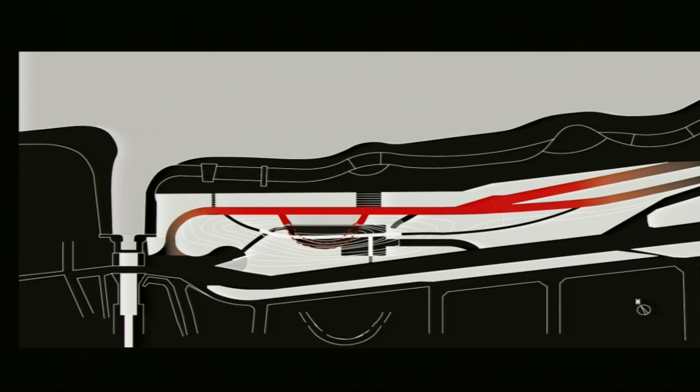I'm sorry, I think there was a recording issue. It's okay, and the plan is like that.

The section is very important. The river is here, the town is here. Actually the tsunami came to here, and they came to here. This is the entrance of the building, and those small houses were destroyed. But luckily, because of this section, this building survived.

This is a big window which separates exterior and interior. It acts as furniture - this part outside, this part inside.

The tsunami happened March 11th. I went to this building April 2nd, just 2 or 3 weeks after the tsunami. At that time the train was not connected, only the freeway was connected. From Tokyo to here it took 7-8 hours, so only by small cars.

Luckily the building survived, but surrounding the town, 60% was destroyed. It's unbelievable, I still remember what was happening around the buildings. I found nature is so much stronger than architectural design. So if we ignore nature, if we forget nature, the architecture cannot survive. That is a strong message from the disaster.

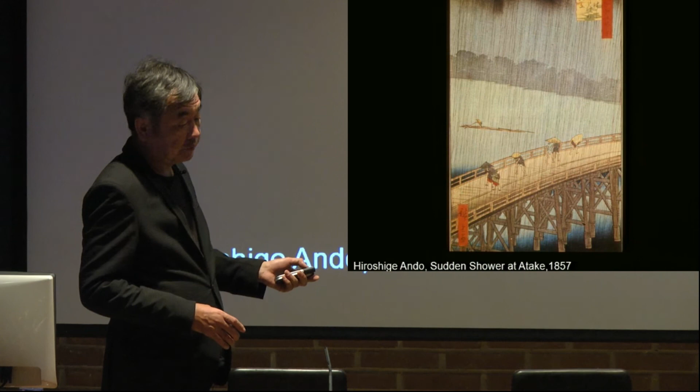This is a very famous Hiroshige Ando work, 1857. Many artists learned many things from his work. A good example is Vincent van Gogh, he made a copy of Hiroshige. Van Gogh thought the message of Hiroshige was to respect nature. It is very different from Western painting at that time. And another great artist who learned from Hiroshige is Frank Lloyd Wright.

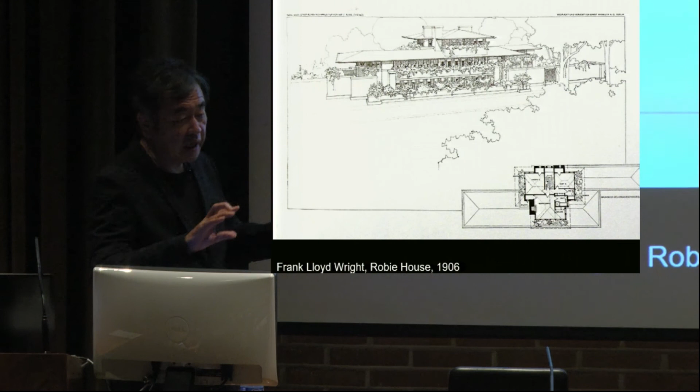This is his drawing, and the style is very much influenced by Hiroshige. Some art historians thought that without Hiroshige, Frank Lloyd Wright could not have found his style. The basis of his style is layering, transparency, juxtaposition between nature and the building, and that idea came from Hiroshige. Actually, Frank Lloyd Wright was a big collector of Hiroshige - in Boston Museum, many works of Hiroshige were collected by Frank Lloyd Wright.

What I did for the Hiroshige Museum is translate Hiroshige's idea into architectural design - transparency, superjuxtaposition of natural material. So you saw in his work the layers of rain. I want to go back.

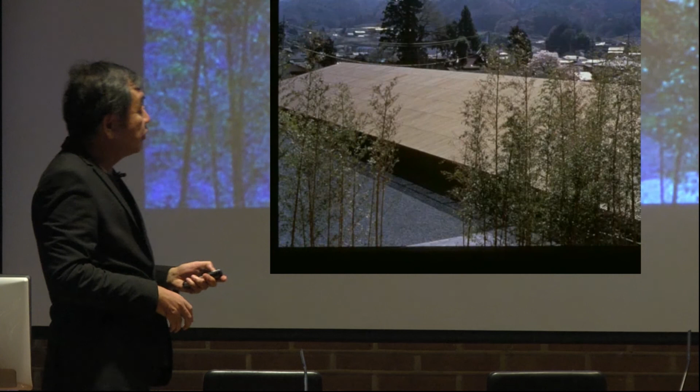Layers of rain, layers of forest - 1 layer, 2 layers, 3 layers. In front of those layers, he draws lines of rain for better understanding. The second layer is bridge, and the bridge is also transparent. The third layer is river, and the fourth layer is forest. Juxtaposition of these 4 layers - that is the important point of Hiroshige.

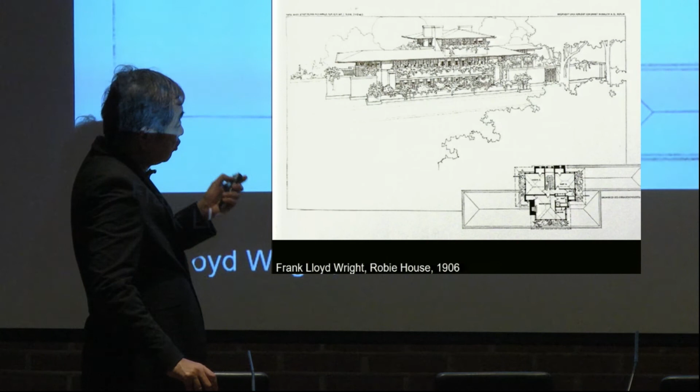And also this guy, Frank Lloyd Wright - for him, layering is a very important method. And for my Hiroshige Museum, I wanted to create layering.

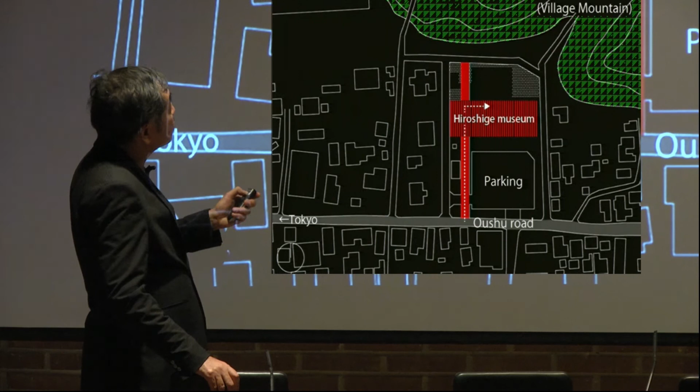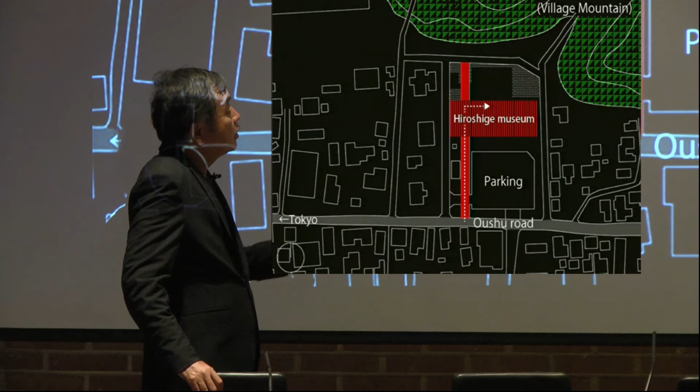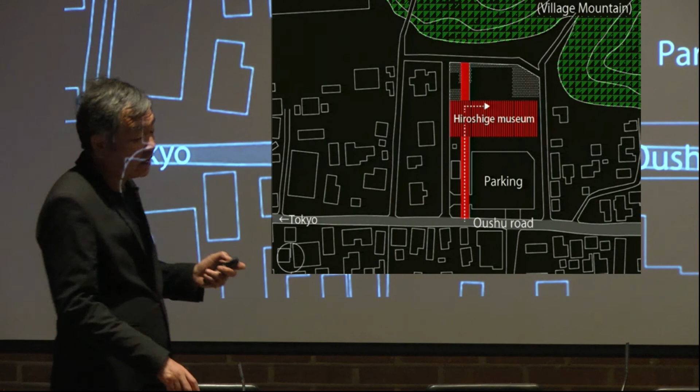Also in the Hiroshige Museum, the museum works as a gate between the mountain and the village. In Japanese traditional villages, the mountain always has a shrine as an edge, because the people believed that if the village mountain was gone, they could not survive - every energy, every material, every resource came from the mountain. The life of the village totally depended on it, and so they built a shrine. This is a very strong message.

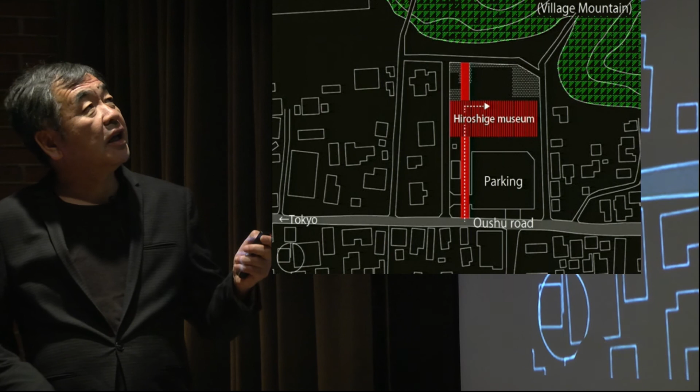But in the 20th century, people forgot the message. They abandoned the mountain, cut the trees, and abandoned the shrines. In this village, the mountain was in a very bad condition, and the shrine was totally abandoned - it became a ruin in this village.

My message through this building is not to go to the building, but to go through the building to the shrine - that is the message of this building. I also tried to use material from the mountain as much as possible.

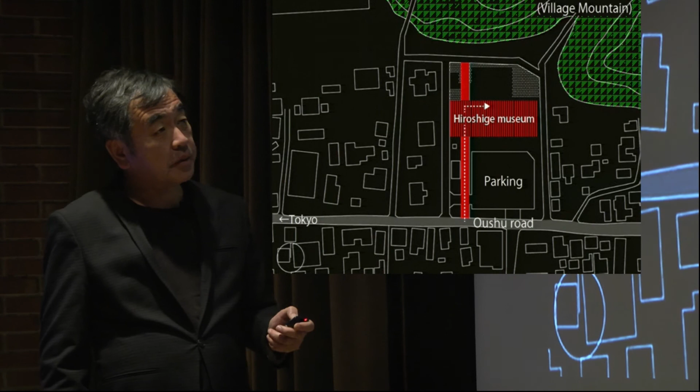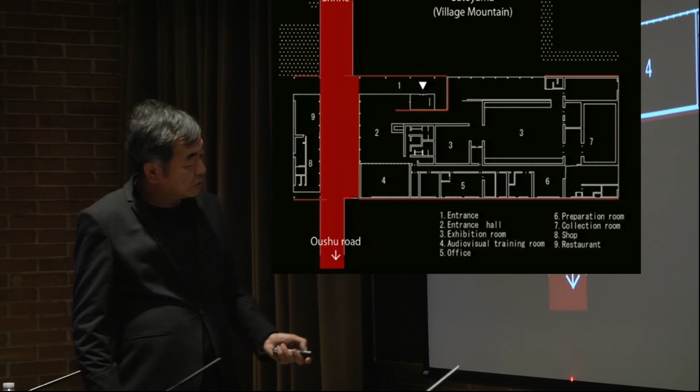The entrance comes from the village center and goes to the shrine, not to the building. So this is my message: the shrine is more important than my building. The building is just the gate to the shrine.

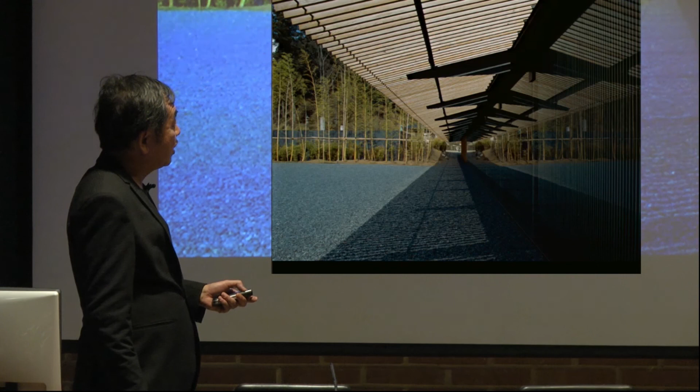And those are the details - transparency and superjuxtaposition are the theme of the detail, and also those materials come from the mountain.

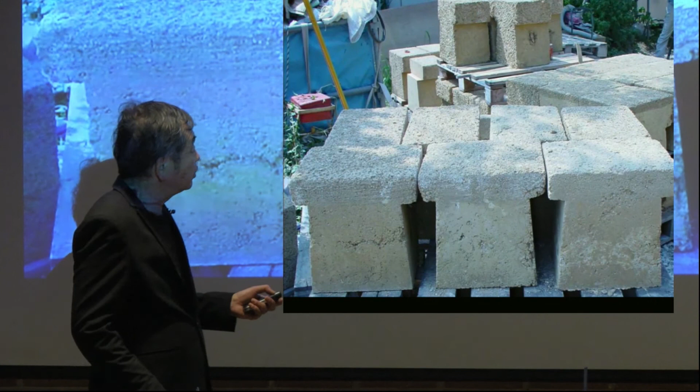That is the Adobe method, and in this village they built a wall and a building using it. But in the 20th century they forgot. So I'd like to reconstruct that method - this is a new block, an Adobe block, made by the soil and clay of the place, and this is the final building.

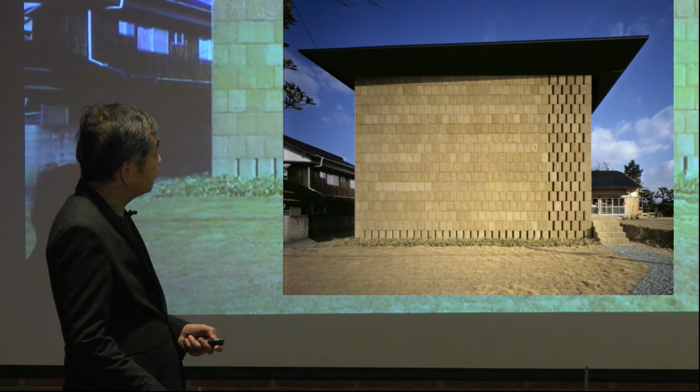In that building we have just one Buddha from the 12th century, and it is one of the national treasures in Japan. Usually we need perfect air conditioning for a national treasure, but in this case the material, the adobe, can control humidity and temperature. So we don't have any machines in the building - the material is controlling the environment, and I think that idea is important.

Before the 20th century, we didn't use machines for air conditioning - the material and the architectural design controlled the environment.

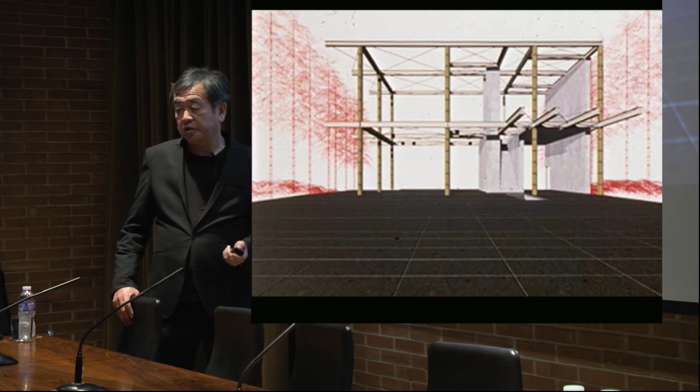The next material is bamboo, as I love bamboo. Bamboo is a very transparent material, but we should solve the problem of cracking. So our solution is to use bamboo for the formwork of concrete - we injected concrete into the bamboo.

Of course we need to cut the fillers of the bamboo. After filling the concrete, we can make this kind of building - the floors, partition, ceiling, all made by bamboo. Superjuxtaposition again, transparency again, by natural material.

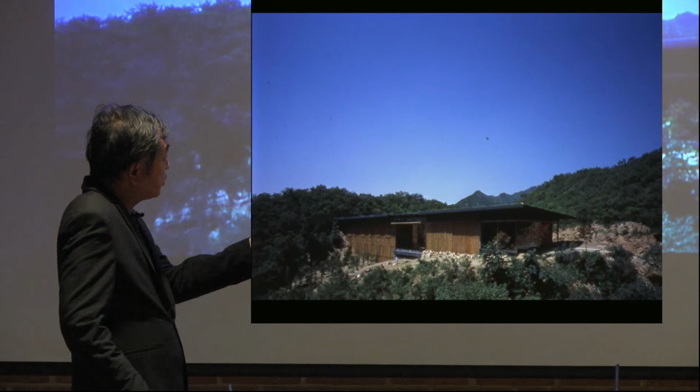After this solution, for a Chinese project close to the Great Wall, we designed this building - you see the Great Wall behind it. The point is how to preserve the landscape. If we try to make flat land, that's a typical 20th century method - an isolated box on flat land. If we go in that direction, we'd have to cut down the trees, but I don't want to do that.

So we keep the landscape and keep the trees, and the building follows the landscape. In the center of the building we have a hall - like the Hiroshige Museum, the hall's penetration connects this world and another world. This is part of the Great Wall. At the center, we have the hall entrance.

And this is the center of the building. And so we call this space the tea house. As a semi-outdoor space connected with nature, that is the most important part of the building.

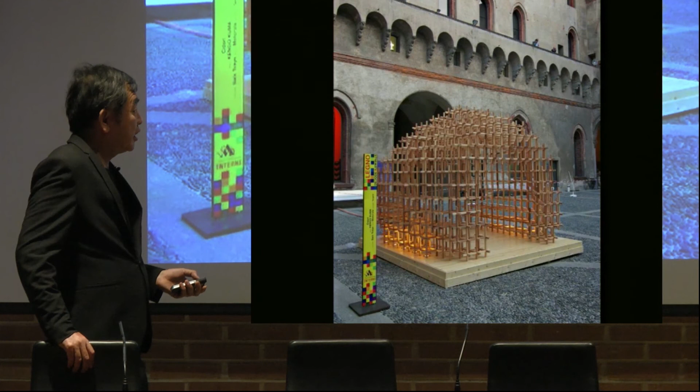And by using wood, we have many experiences, many trials. So one example is a project in Milan. There's a small pavilion in the courtyard of the old palace. This is the toy for kids in Japan. It's a traditional toy.

The material is very simple. Three types of sticks with three types of joints. And from those simple elements, the kids can create anything. And without any steel metal joint, without any glue, they can make anything. The three types of joint, and just twist, finish.

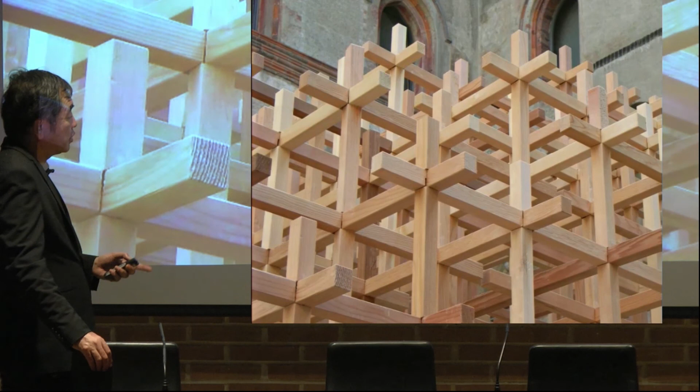And so we brought those sticks from Japan, with a special joint system. And our students built this pavilion in a week. After the experience, we wanted to achieve a permanent building, permanent structures, by the same system. The GC Museum is the name of the structure. In our Tokyo University, we tested this structural system.

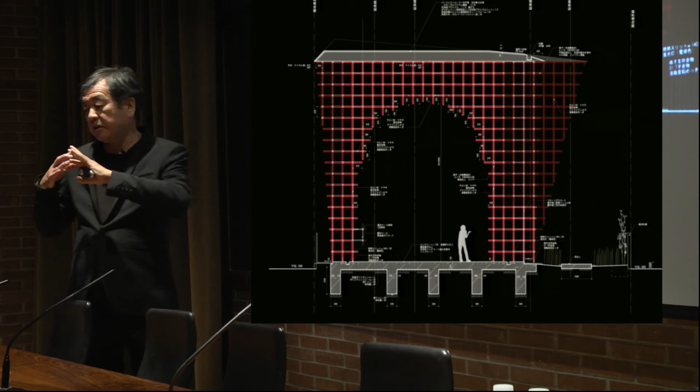And the basic idea is we made this block in the factory, and we brought this unit to the construction site, and we made this one. Without any big column, the thin structural system is supporting the 10-meter high building. This is the completion. This is the building.

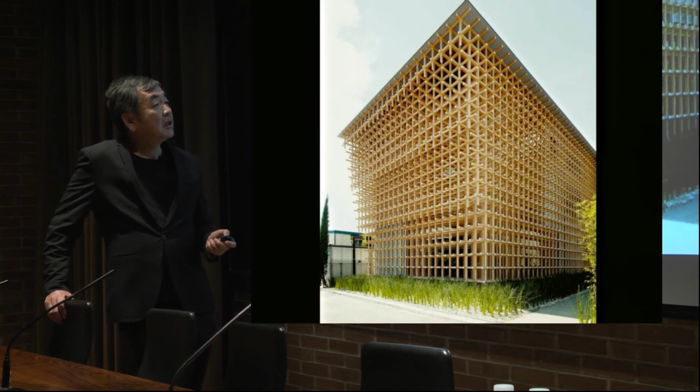And this section is important. This section is to protect the building from rain, from climate, and also this white paint is important to protect the edge of the wood. This is the interior. This is the ceiling of the building. We have the glazing in the grid, but this is almost transparent.

And the next step is to make a bigger structure by the same system, a similar system. It's the Yusuhara wooden bridge. It's a big span bridge made of wood. This is the interior. For a wooden bridge, to cover the structure has some meaning, because wood is not so strong a material. And beneath the roof, we can have this kind of exhibition space.

And also this is a space for the artists. Artists can stay in the village. Living in the village is very exciting as an experience. And for the same village, we designed one hotel. The name of the hotel is Marché Yusuhara, Market Yusuhara.

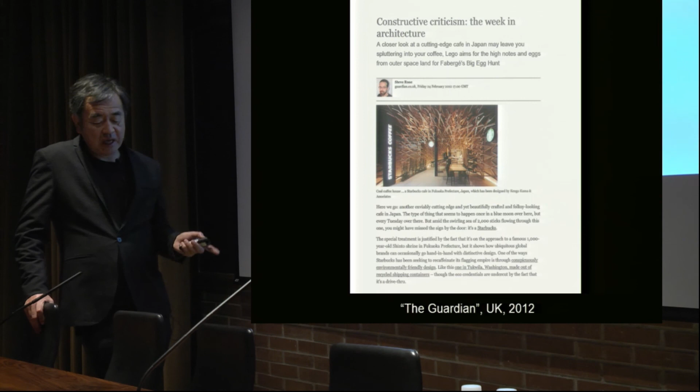And this is a little bit more expensive than a normal Starbucks shop. But the Guardian newspaper introduced this Starbucks, and after that, Starbucks became very happy with that project.

After the Starbucks project, SunnyHills, a pineapple cake company in Taiwan, came to us. So this is a shop for them. This is also not decoration. It's a 3-story building by the same system without any column. This is the interior. The wooden sticks, again 6 centimeters by 6 centimeters, are supporting the building.

This is a rooftop garden. And this diagram shows the structural system of this building. The name of the system is hell joint. Hell joint. It's a very strange name. So why is it called hell joint?

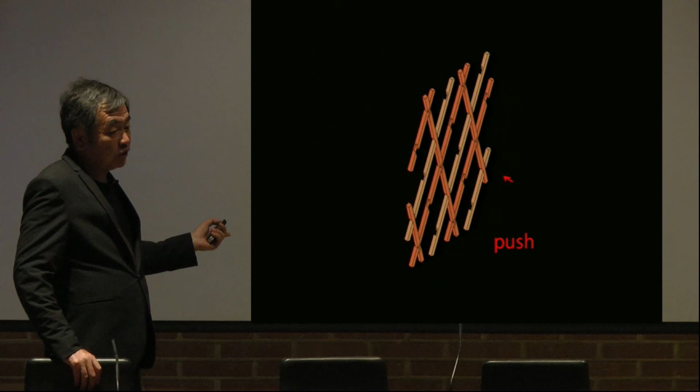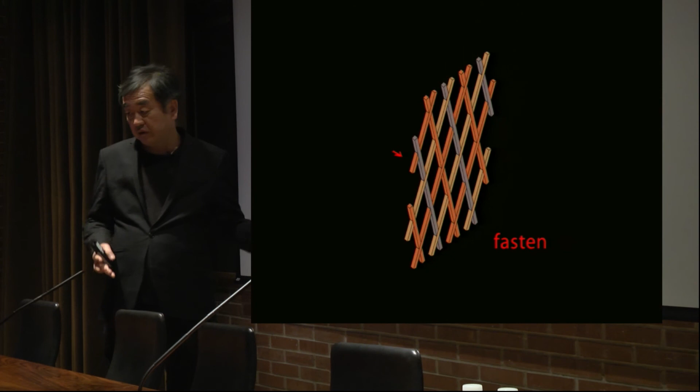Because it is a 3-layered system of wood. If it is 2 layers, we can slide, so we can take it apart. But if we have 3 layers together, nobody can take it apart, and then it's called hell. If you drop into hell, nobody can come back, and this is hell. A very scary name. And then it shows the 3 layers.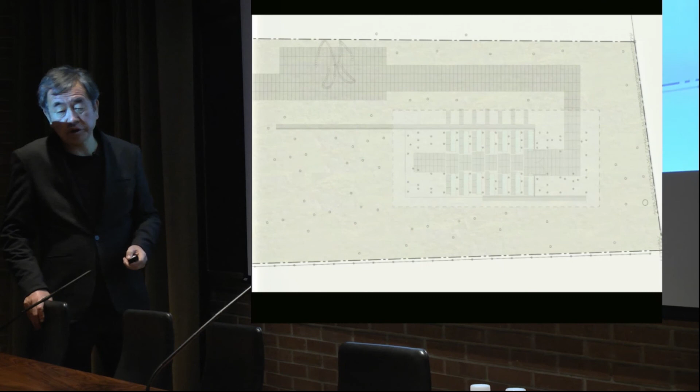This is outside, and this is inside, but the border is very ambiguous. And this is a transparent roof in the forest. So nobody can say which is architecture, which is forest. And also the moss is going into the interior, and the border is disappearing. So we designed those acrylic benches as also transparent.

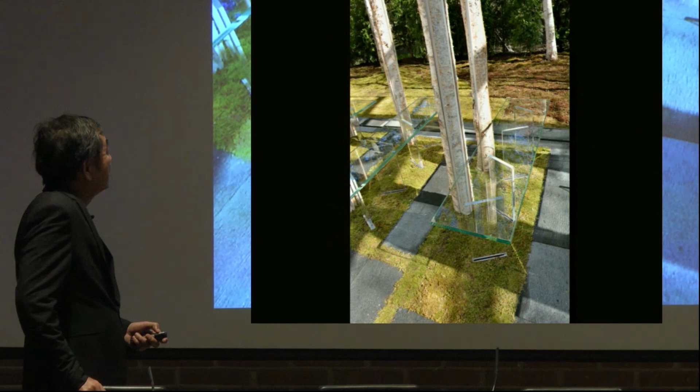And this project is built in the center of Tokyo. It's built in front of this old temple. This temple is a very interesting temple because the temple and the galleria, a street, are set together. So after going to the temple, people go to the galleria to do shopping, and that is a traditional lifestyle of Japan. After the temple, the galleria, interesting shops, and there's a gate.

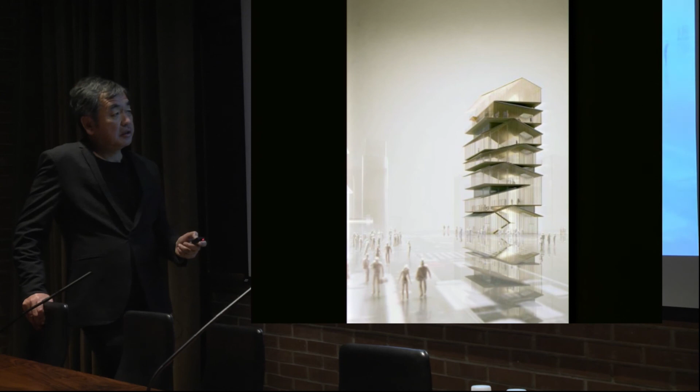And our site is here. This is a proposition for the competition. In front of the gate, 8 wooden houses. That is the first idea. Because this area is a very historical, traditional area, a big concrete building does not fit the context of the place, and that is our proposition. And in the sections, we can utilize those triangular spaces for the mechanical machines.

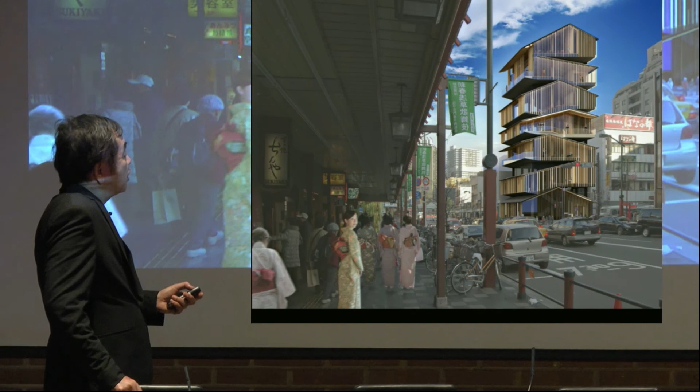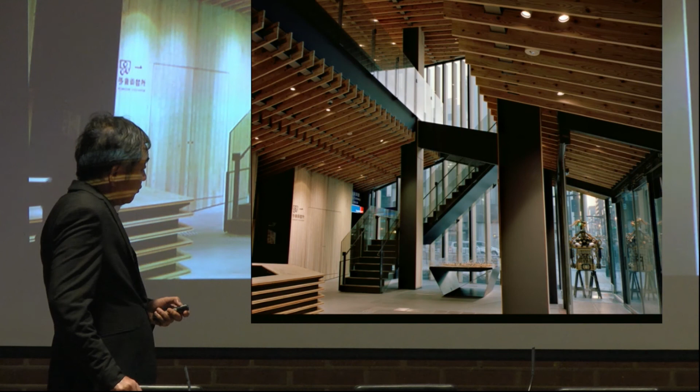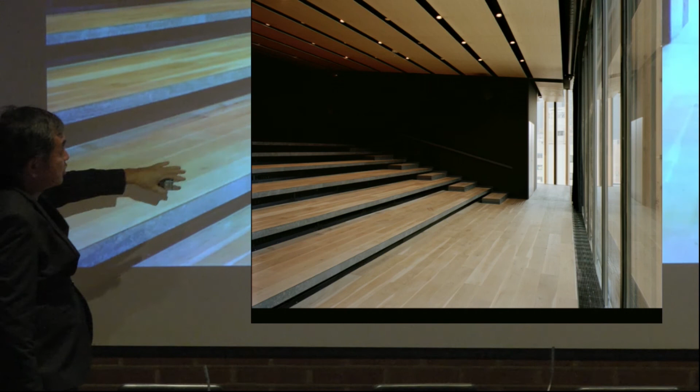And this is a rendering for the competition. And this is an image of the final building. There's a temple, galleria, gate, and this. I think this is a set of life. This is the ground floor, and this is the 5th floor. The roof is inclined, and we use the inclination for the steps of the stage as a small theater. This is the rooftop cafe. Look down at the galleria.

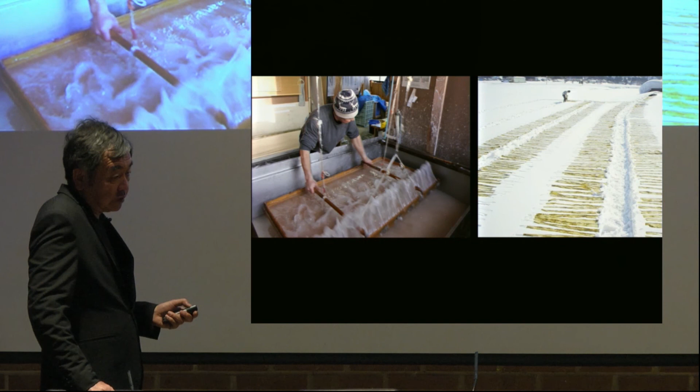Another material we use is rice paper from the place. This is a special method that they are doing. Those snows make rice paper whiter. This is called snow rice paper. And this is earth, and the snow rice paper. And that snow rice paper is used for the sofa of the building. We designed those sofas.

And also still, some farmers are making this silk product. It's a beautiful natural silk product. We use this material for the counter of the office.

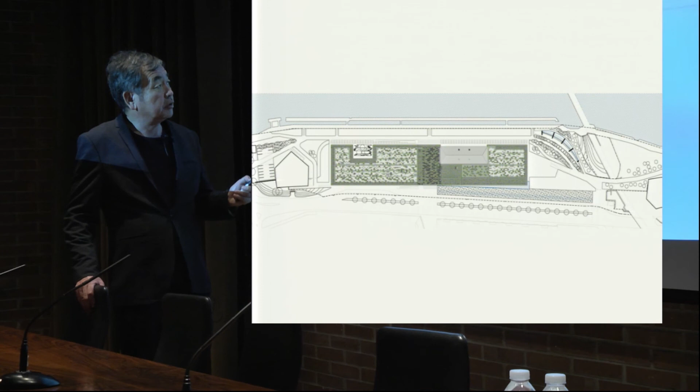And in Europe, we are also designing based on that method. There's a project in France, Besançon City of Arts and Culture. The site is here. There's an old building, nature. This is my favorite condition. We preserved all the building. The old building, nature and city were connected by this penetration. This hole. This is an important connection, an important gate to nature.

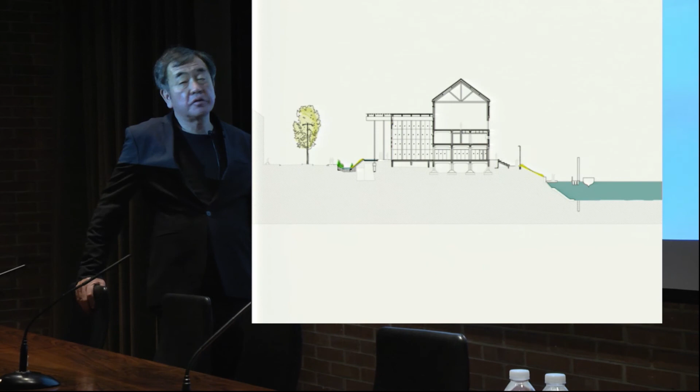The river is here, city is here. So we designed the green slope, we designed this biotope, and also we designed this covered space. In Japanese buildings, we have engawa space. Engawa space is covered space between the exterior and the interior. That is important as a vocabulary. So in this building, we have a hall and we have engawa space. This is the engawa space. This is a small creek we designed.

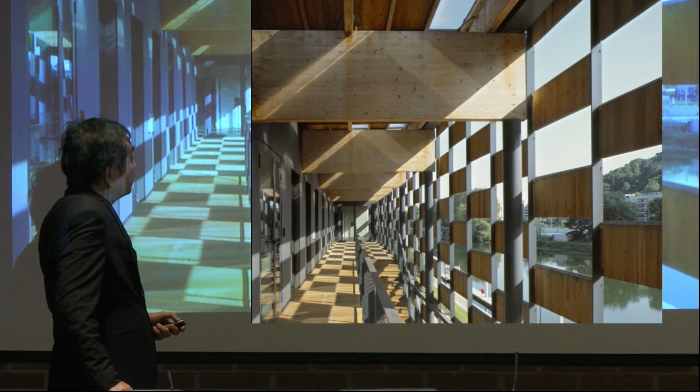And the material came from the mountain. In that case, we use larch from the mountain. A preserved building. The conversation with old and new starts here. There's a concert hall made of wood. And there was a rooftop.

And this is a project for Marseille, the Fonds Régional d'Art Contemporain. We found a unique material from Marseille. I did research, and I found an interesting factory producing recycled glass. And the effect of this glass reminds me of the effect of rice paper screens. It just makes light softer and warmer.

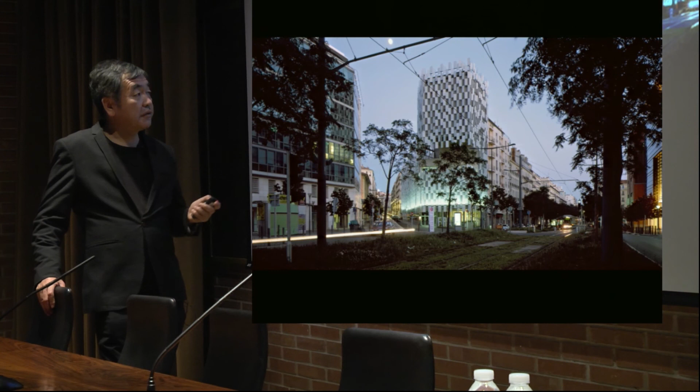I want to make the building more open to the public. And then we use this kind of screen of soft material, like that. This is the interior. This is semi-outdoor space. The effect of light can happen like that.

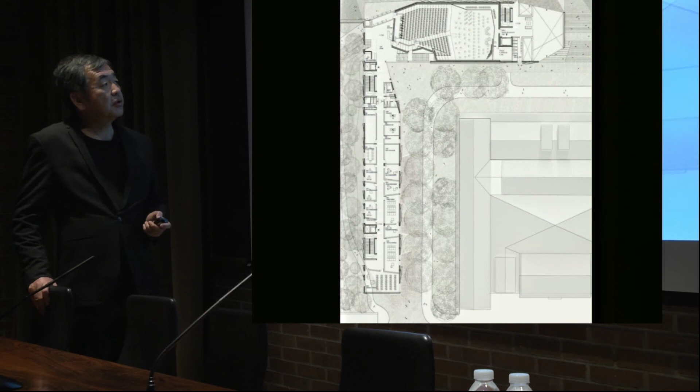This is a project in Aix-en-Provence, Darius Milhaud Conservatoire. This is the building. In Aix-en-Provence, we worked with an aluminum company. They did beautiful aluminum paneling. Diego was in charge, and we were talking about the effect of origami, the folding aluminum creating shadow, protecting windows from natural light, a sustainable solution for that kind of climate.

And also Aix-en-Provence is famous for Cézanne, the Sainte-Victoire, the beautiful shadow of the mountain trees. So we got a hint from that. The interior is a concert hall. Asymmetry is good for acoustics. Another origami effect made of wood.

This is the newest project in Paris, the Entrepôt Macdonald. In this case, McDonald's is not hamburger. Macdonald is the name of the boulevard. This is the location. In 1970, this Entrepôt Macdonald was built. It's a 600-meter building, a long industrial building. The idea is to convert this long industrial building to space for the community.

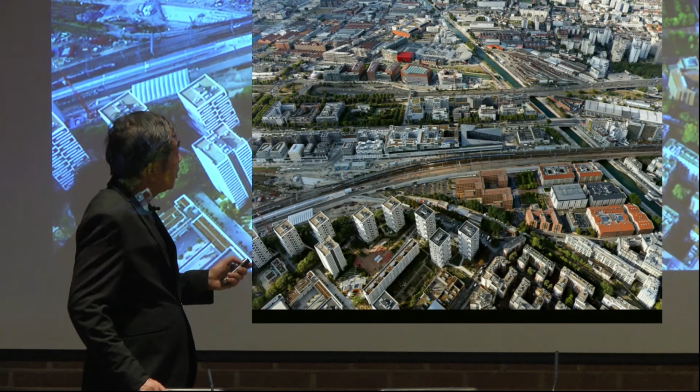We were selected as the architect for this part of the building. And the grand design was done by Rem Koolhaas, OMA. Their idea is to preserve this existing part as an entrepôt and add each building. The French architects added a concrete box, but we added a roof, a different idea, because the roof can create semi-outdoor space between the exterior and interior. That is our idea.

And again, we don't want to close the building. This type of C-shaped courtyard can make connection possible. The neighbors and the building can have a conversation through this C-shaped courtyard. This is the roof. There's another origami effect for the roof.

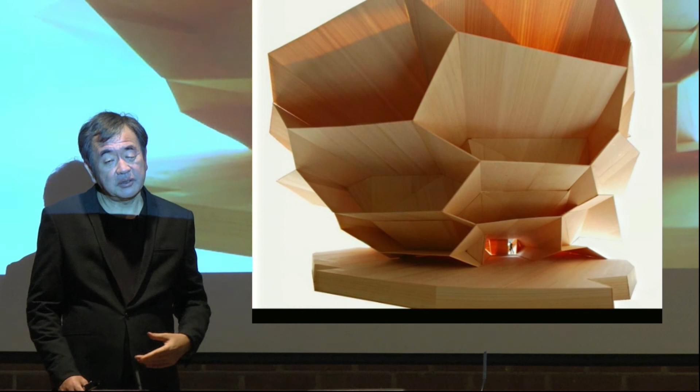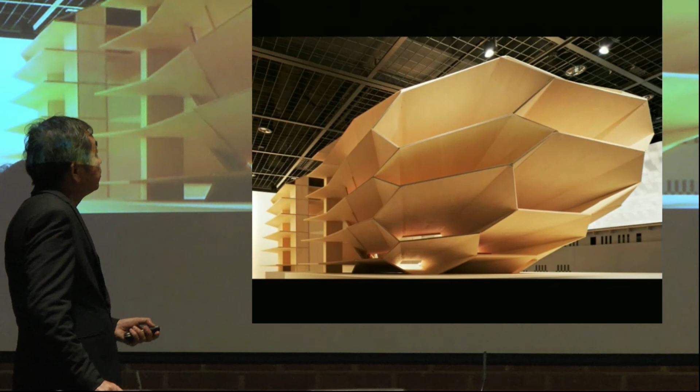We try to avoid the grid system; the column and beam system is not fitting the program of the opera house, and our solution is this kind of hexagonal honeycomb shape. So this honeycomb is supporting the building. This is a plan. This is an opera house for 1,500 seats, and the honeycomb system is not decoration. The honeycomb system is supporting the building and also creating the interior space. This is the honeycomb system to create the interior.

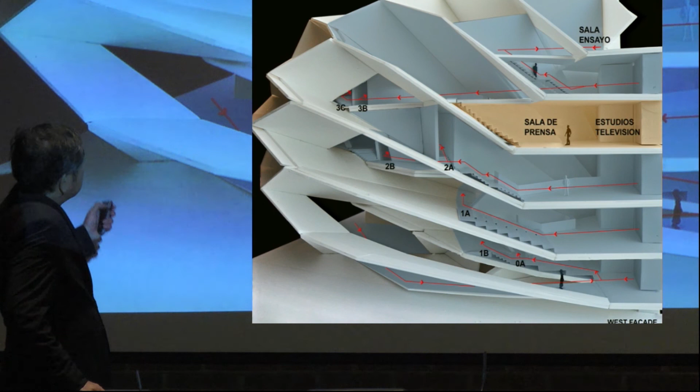This is a section of the whole system, the space. The honeycomb geometry is controlling every space. The honeycombs are dominating every space, controlling every space to create small human spaces like that. So we hope the construction starts soon. Because my memory of Granada is from when I was a child: my favorite song is Miles Davis' Sketches of Spain. I still remember that song, and Granada is a place for that Sketches of Spain, and I want to realize that project.

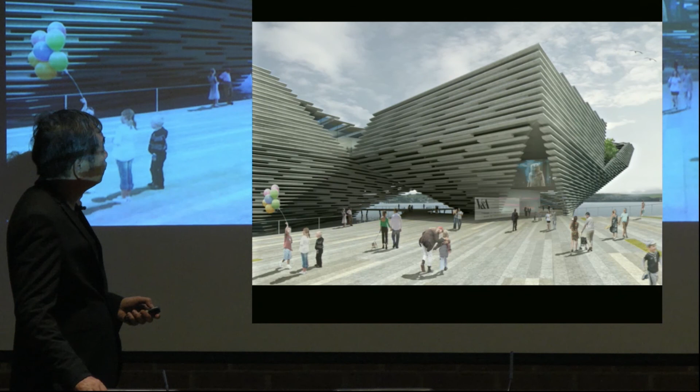The Victoria and Albert Museum, this is 2010. Again, as a competition, we won the competition in 2010, and finally construction started last March. So we got a hint from the cliff, the section of the cliff. This is a first sketch, and this is a plan. The big river and the land will be connected by this museum. We design the hole. We cut the hole to create penetrations, a connection to the beautiful landscape of Scotland. And this is a precast concrete detail that came from the cliff.

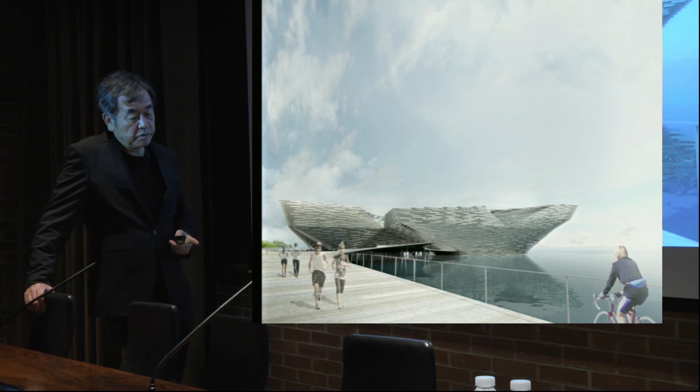And this is the center. This direction is going to the center of the town, connected through this arch. That idea is important for us. The building is always a gate, not the final object. This building is a gate to bring people, draw people to nature. Interior.

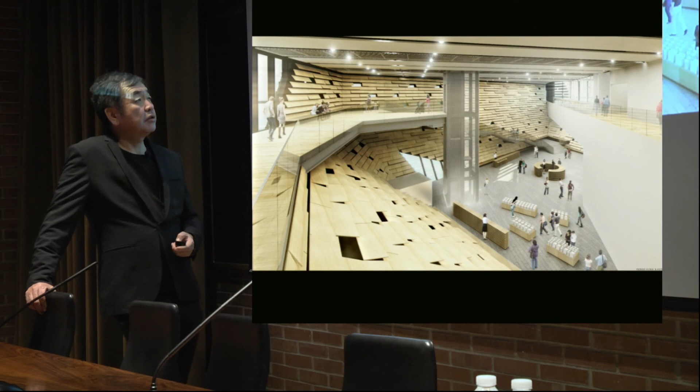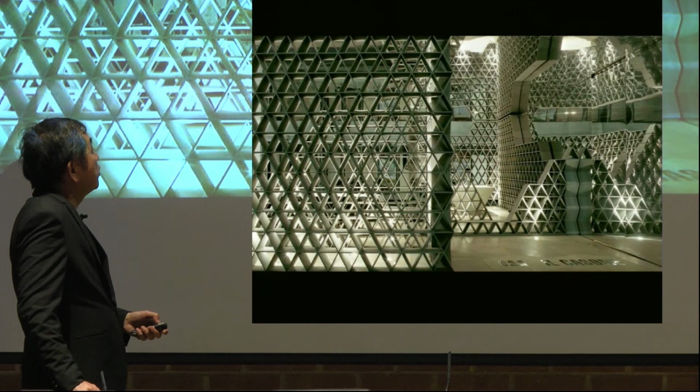And after that, we decided to apply this system with aluminum cards. In the old street, the wooden houses are beautiful as a heritage of the town. This aluminum card castle is for a temporary event. Easy to move, easy to construct. This is a joint. Again, it's the same thickness, 1 centimeter. But it's a double panel system with a special joint.

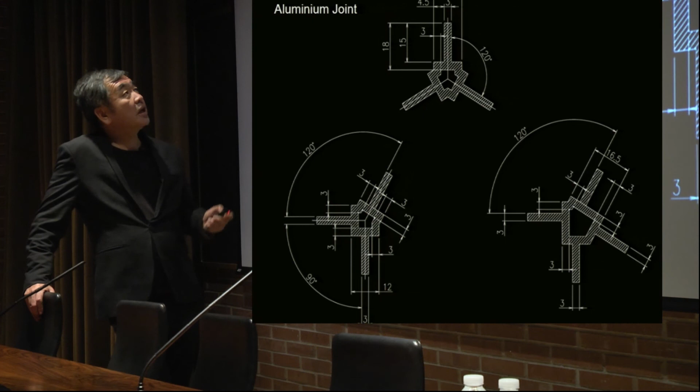And after achieving this structural system, we decided to adapt this system to a house. This structure is strong enough for creating a house, and our students made this house by themselves. One single material can create the kitchen and anything in the house. And after that, based on a similar system, we designed a small boutique, the Lucien Pellat-Finet boutique, a very expensive cashmere shop. We just have 3 types of joint, but the effect is like that.

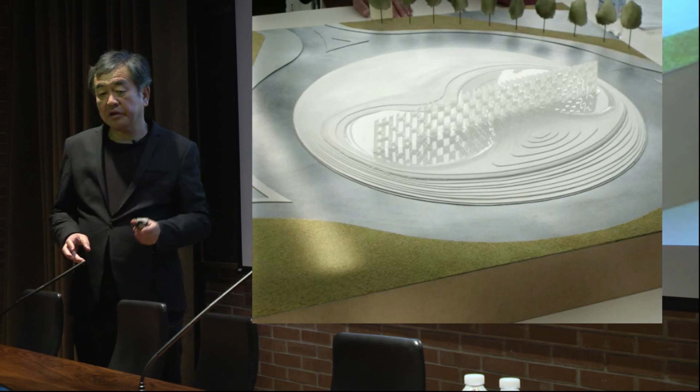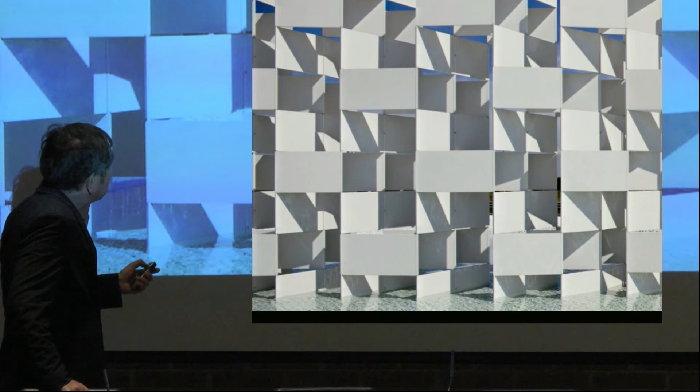And the next material is ceramic tile, the ceramic tile cloud in Italy. The point of this project is that the ceramic tile is supporting the building. It's very different from the normal use of ceramic tile. Normally, ceramic tile is for cladding, the surface. But in this case, ceramic tile is supporting the structure. This is a structural analysis of this monument. It's a 4-meter high structure, and the vertical element is stainless pipe. Again, it's 1 centimeter, a very thin stainless pipe, and the ceramic tiles are a woven structure.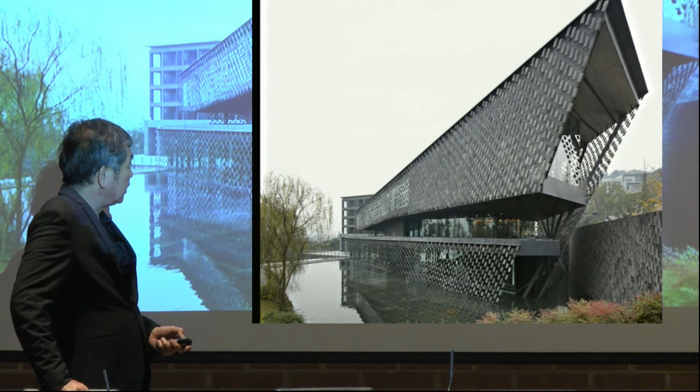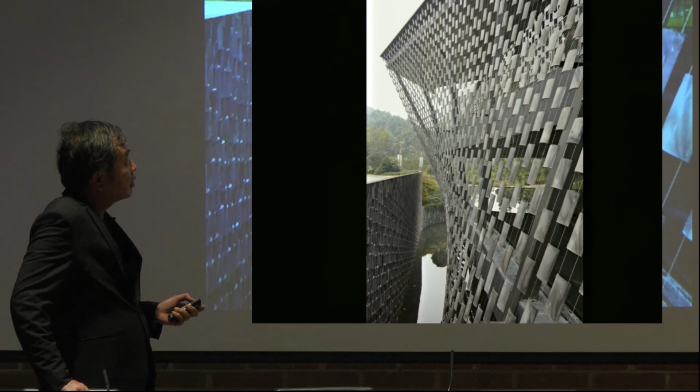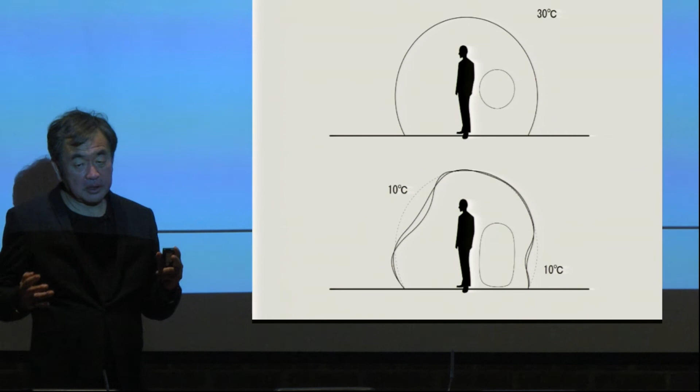And the next material is more unique. The material for this pavilion is shape memory alloy. It's an alloy, but it has a special memory for temperature. At some special temperature it becomes very hard; at other temperatures it's soft. That is the secret, the magic of this material.

If the temperature is high, it's very hard, like that. If the temperature drops, it gets softer. This is the structural system. This is how to make it. And at night time, if the temperature drops, the top of the pavilion drops like that. It's very organic architecture. Organic architecture is not about the final shape. Organic architecture comes from the system, that is my idea.

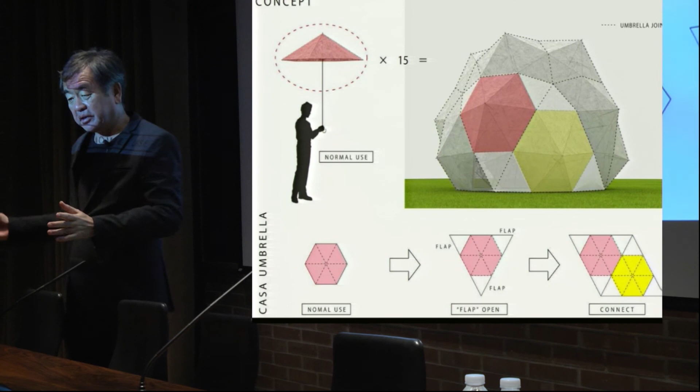And Casa Umbrella is a small pavilion in Italy. In Japanese, casa does not mean house. In Italian, casa means house, but in Japan, casa means umbrella. So we are using casa like that, as a kind of double meaning: the umbrella house and casa house.

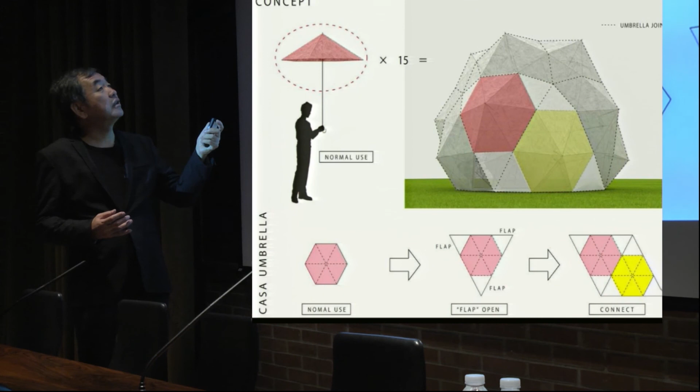But the hint comes from Buckminster Fuller's idea. The Fuller dome: he wrote that 20 facets create a perfect dome. So we got a hint from his idea, but the difference is the structure. This is a unit. It's a very fashionable umbrella. And 15 umbrellas can make one pavilion, and 15 students can make this.

And the joint of the umbrellas is just a zipper. Buckminster Fuller has a framing, but here it's just the umbrella frame and membrane. So it's a tensegrity structural system. The membrane's tension and the compression of the frame work together, and this supports the pavilion. As you see the zippers, and this triangular part is important for this geometry, the entrance.

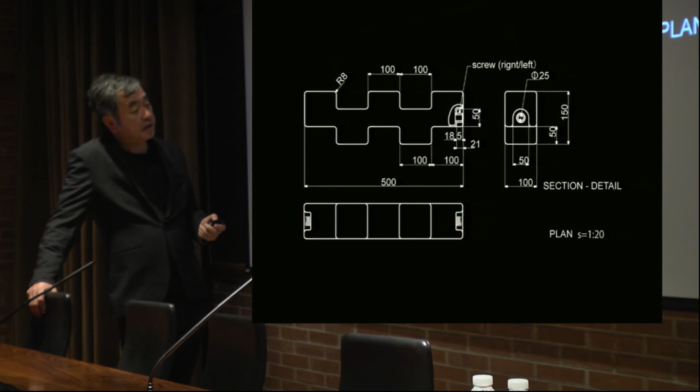And a similar idea, the water block house, got a hint from this block, controlling weight by filling it with water. And the next step is the New York MoMA exhibit, the Home Delivery exhibit. This is the next version of the water block house. In this new version, we have two bulbs at both ends of the block, and by putting two blocks together, we can get the flow of water in the wall.

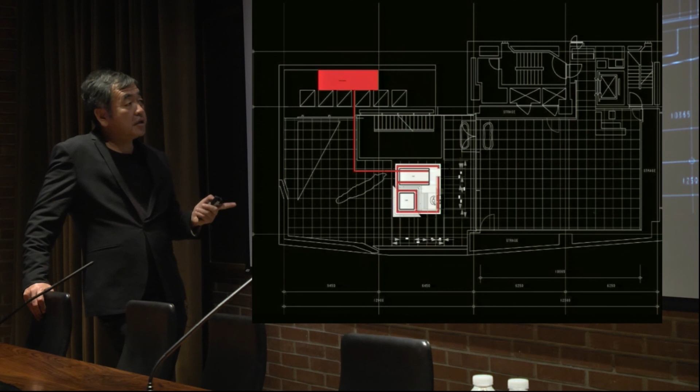Usually the wall system and the piping system are separated, but in this case the wall itself is piping. The water flows in the wall and in the floors. In this experimental project, the water flows in the building, in the wall, in the floor, and in the bed as well. And the hot water can be created in these heat collectors outside. And this is also student work.

The units are connected like that, and the water flows in the building. This is the interior. This is a small bed. Even for Japanese, it's too small. This is the kitchen, and a small generator. The aim of this project is the autonomy of the house: if the infrastructure is down, we still want to survive in that kind of autonomous house.

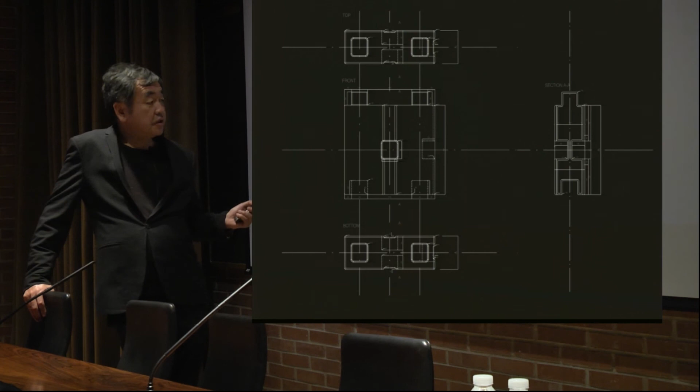So this idea was realized in a permanent house, the Beijing Tea House. This is the unit for the Beijing Tea House. This is the structural system, and this is the interior. This is in front of the Forbidden Palace. It's a very, very special location; we can see the Forbidden Palace from here. But the structure is very unique. This is the interior.

This is the facade. This street is a kind of preserved area, and we had to keep the roof of the old building. Those are the neighbors. We kept the roof of the old building, and this is the new structure made of poly tanks. This is the rooftop, and there's the Forbidden Palace.

As for tea houses, in Frankfurt, this is a tea house made of membrane. It's an inflatable tea house in Frankfurt, a very instant inflatable structure. This is a traditional tea house, but with very contemporary technology. And Fuan is the next version, at the Washington National Building Museum. We built this tea house.

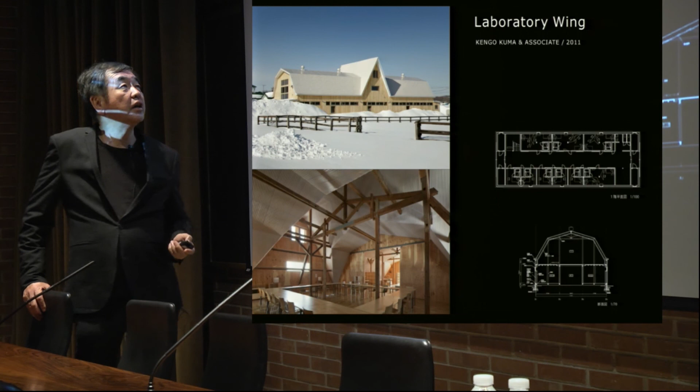In this Hokkaido village, we are inviting many universities to participate in the competition of experimental houses. This is bamboo from Bangladesh.

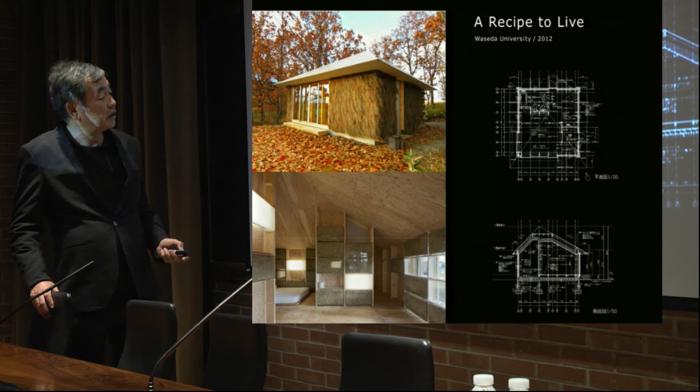This is hay. The hay is naturally creating the heat. The hay is a heating system, and in this case, the horse is creating heat.

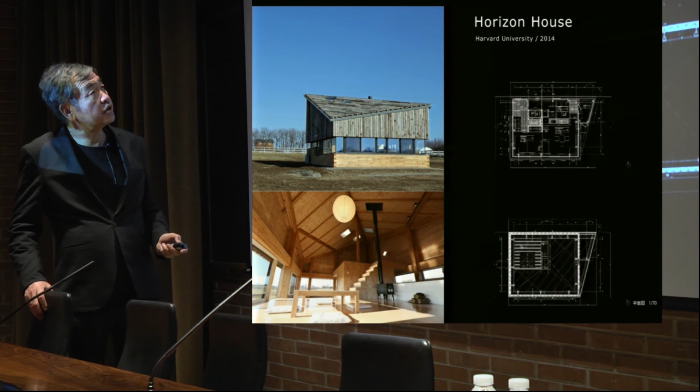Harvard GSD is participating in this project. The University of Berkeley has created this house. And the last project is a very light structure made by magnet, wood, and membrane, as the magnet is connecting those sticks.

The magnet is connecting those sticks. The idea is we can carry this house, like that.

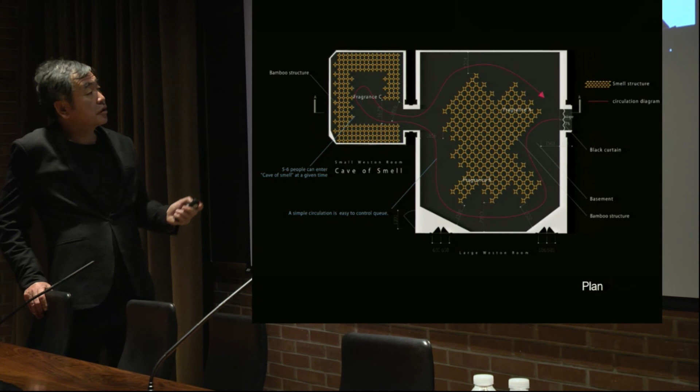This is a test pavilion in the Royal Academy of Arts in London. They gave us 2 spaces. This is a pavilion, 2 pavilions. One, the smell is the smell of wood. The other is the smell of tatami mat. The tatami mat smell is also a very, very special smell.

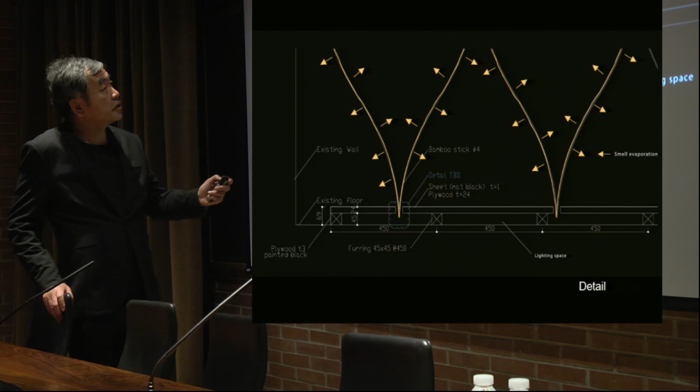And the liquid and the bamboo sticks are jointed by plastic tubes, like that. And this is the final solution. It's almost transparent, almost nothing.

But so we can have the experience. So that is an ideal structure for us. The structure almost disappears, but the experience, the effect, still exists. So for human, that kind of experience is very important, I think. Thank you very much.